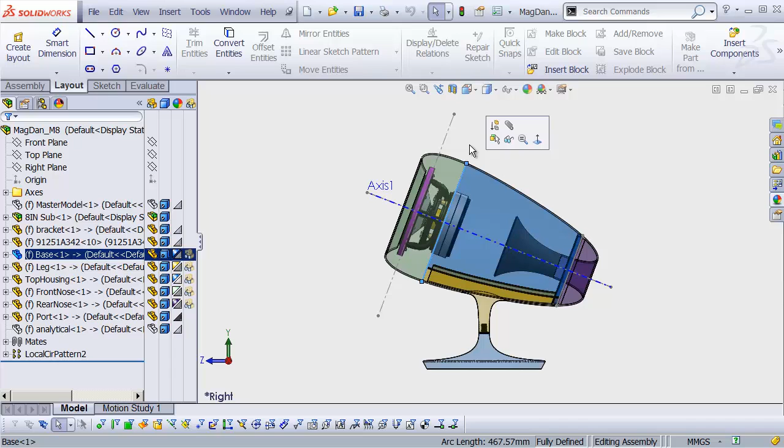And so here is a design tip for you. First of all, adding decorative details like that is expensive. It costs money. It always costs money to add material to your product. And so you need ways of justifying that, right? Well, a good way to do that is to tie it in with the functionality of the product. And so here's a great example of one way we might do that.

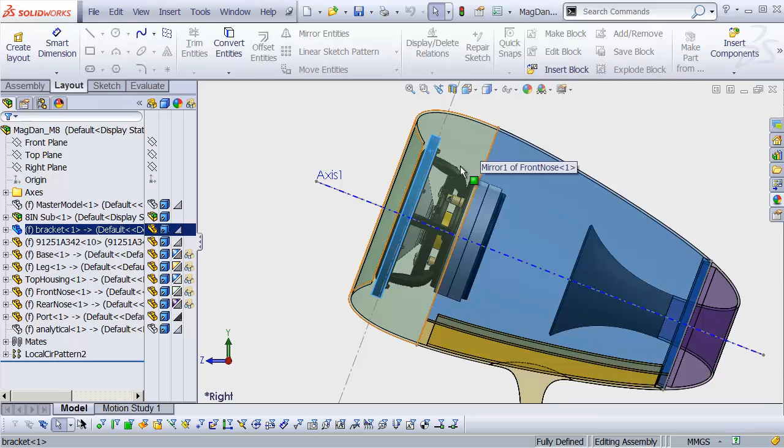For example, this bracket, if you'll notice, is still floating out in space. It doesn't have a way of connecting with the rest of this housing. It's just floating there. And so what we can do is have it come back to this intersection point, and we can use the intersection of the cone and the body in order to kind of mount this in place and also end up with our orange highlight in the process without having to justify that to anybody.

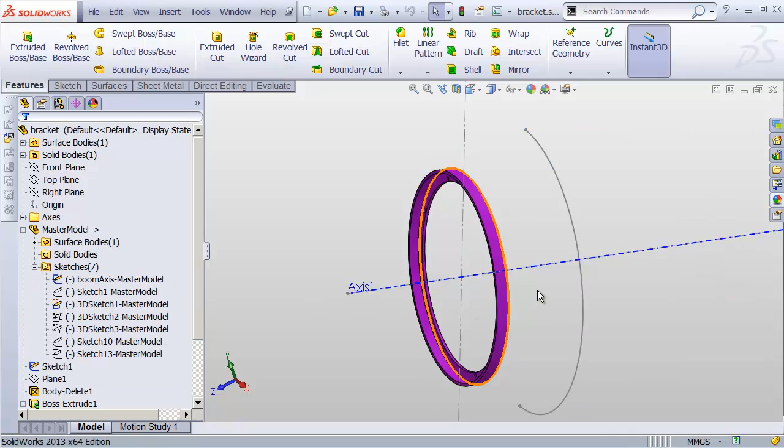So this is a great little lesson both in terms of SolidWorks, but also just getting what you want as a designer. I'm going to open up this bracket part in its own window. And let's head into the Master Model Import feature under the Sketch Geometry, and I'm going to find that sketch that shows me where that intersection point is between the nose cone and the rest of the body. We'll be needing that. I'm also going to show that original surface body because we'll be needing that as well.

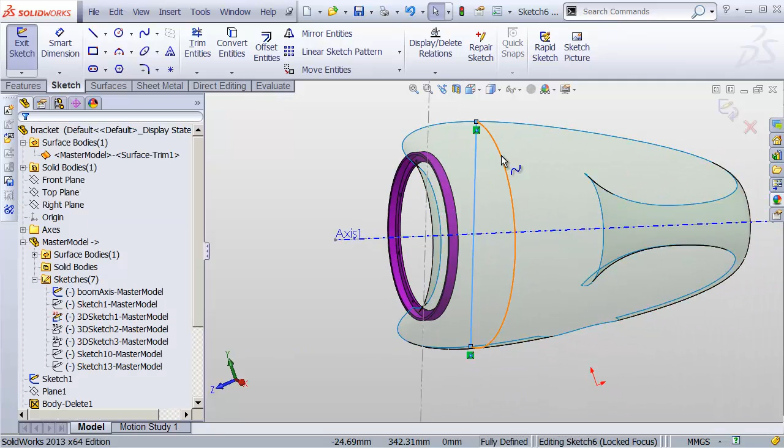Now, the first thing to do is to go to the right plane and create a sketch, and I'm going to sketch a line that goes from this point to that point, each end of this split line here. And then I'm going to go to my features and extrude that. Now, it's going to be a thin feature, obviously. It would have to be because it's an open profile sketch, but it doesn't have to be 10 millimeters. Let's make it 3 millimeters. And I'm going to go forward with that.

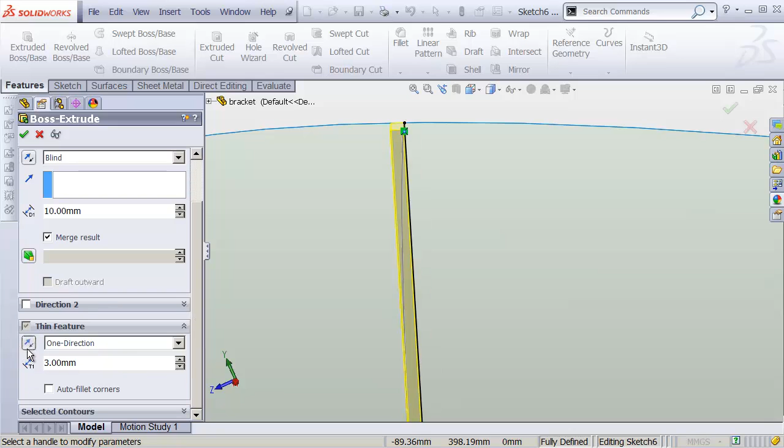You can see that the thickness is going straight forward from my line. If it were going the wrong way, then I could flip my thin feature to the other side in one direction, and that's what I want. And then instead of blind, let's go up to surface, and I'm going to go straight up to this exterior surface and hit OK. And that's actually going to be a great start for us. This is what that orange highlight is going to be comprised of.

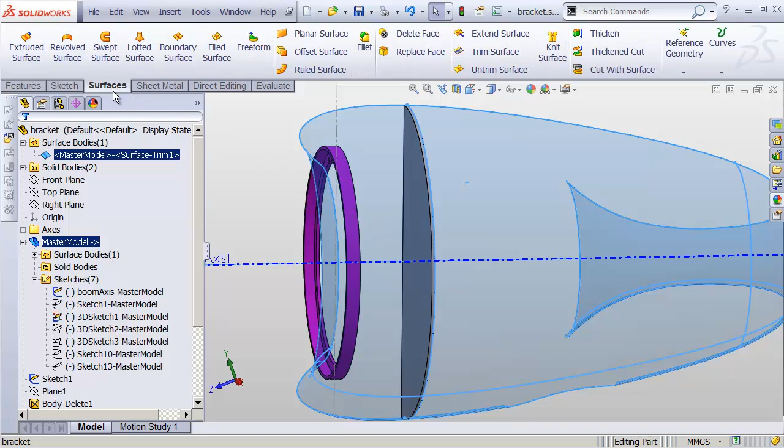Next, we're going to need an offset of this surface. So let's grab that surface and head to the Surfaces tab, over to Offset Surface, and we're going to bring this in by 3.5 millimeters, let's say, and hit OK. And then hide the exterior one. And just so that we're not visually confused here, I'm going to go into my appearances once again. I'm going to use one of those default appearances and set this to yellow. So it's really easy to visually differentiate that from the original surface in case we show that again later.

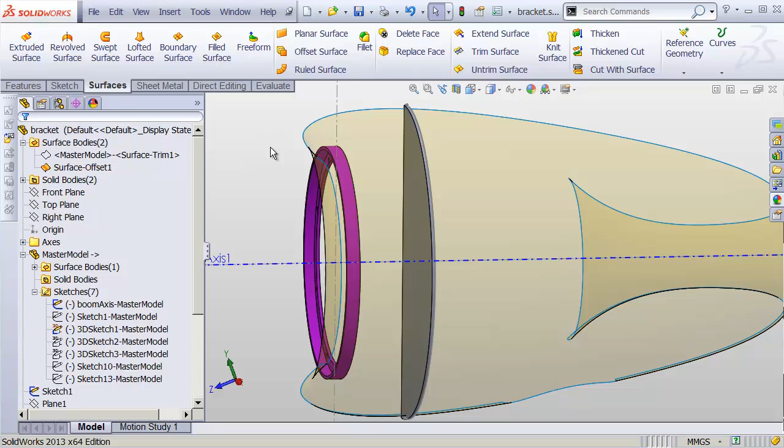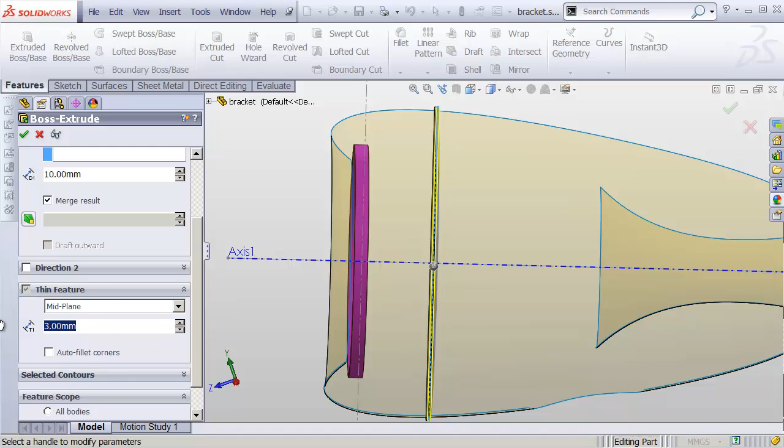Now I want to go to that same original sketch that I just created. Let's actually scroll down here, find that extrude feature, and there's that sketch we created. Let's do Features, Extrude Boss again. This is another thin feature, but instead of one direction, we're going to do mid-plane, so it goes both ways, and we'll make the thickness, I don't know, let's say 20 millimeters. So it's really wide, going out both sides.

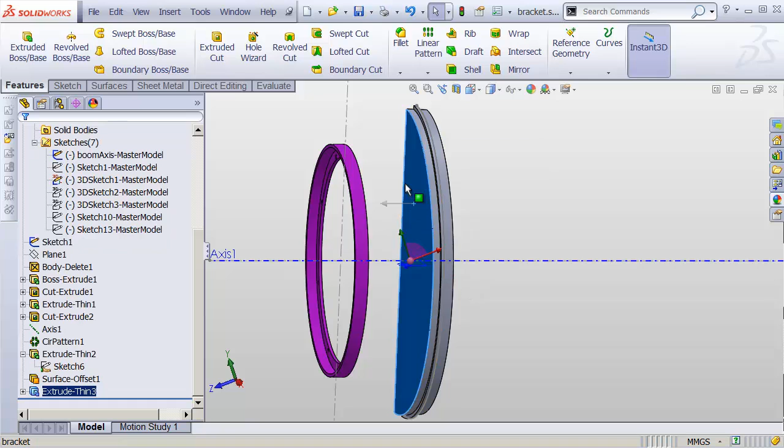And once again, instead of blind, we're going to go up to Surface. We'll choose that Offset Surface. And yes, if we want to, we can go ahead and merge result because it's going to merge with that interior piece. We'll hit OK. Now we can hide this offset surface, and we're left with the beginnings of our bracket. Now all we have to do in order to finalize this is hollow this out and then connect it with the front piece. We'll start by hollowing it out.

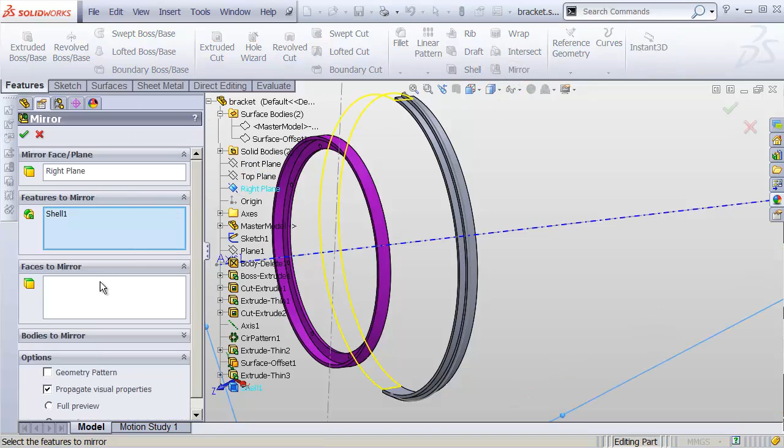Let's do a shell command. Select that face, and that face, because those are the ones we want to get rid of. And then under the parameters, let's make this a 3 millimeter wall thickness and hit OK. That should leave us with just a hoop ready to be used. We can mirror that across the right plane. And this is going to be bodies to mirror, not features to mirror. We'll choose that body. Yes, merge solids, and hit OK. All right, now we can hide that original sketch. And let's go ahead and try to connect these two pieces together.